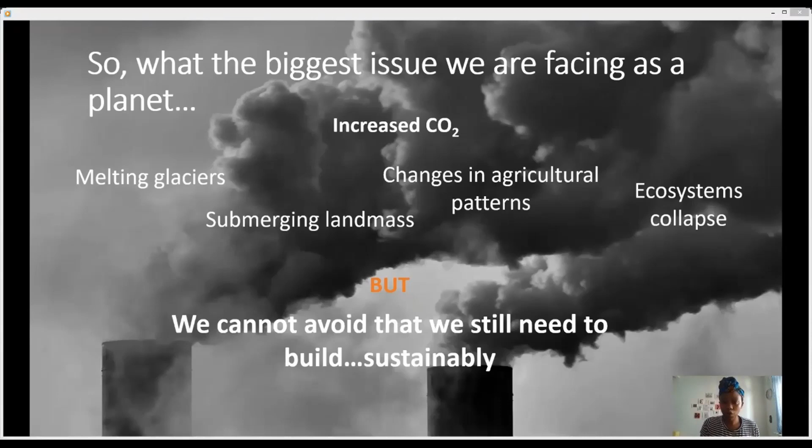However, considering all of this, we cannot avoid the fact that on the African continent, we are still growing. Therefore, we still need to build sustainably. And that's really the core message, is that we need to do this sustainably. And the question is, what does that entail? What does sustainable urbanization actually look like? And how could we do this in a more interdisciplinary approach?

So a lot of the time we talk about multidisciplinary, and I myself speak about multidisciplinary a lot, but multidisciplinary just means that different disciplines exist. It does not necessarily mean that these disciplines play into each other. It just means that they are all within the same space. So you'll have civil engineers doing civil engineer things, architects designing buildings and so forth, city planners planning for the future, without necessarily interacting very intensely with the architects.

Or even the people of that place in which they are planning, or even material scientists to find out the most sustainable types of materials that can be used, working together with civil engineers to see if these materials bear enough load, and so forth. All of this is generally widely done very separately. And I think we all know that this has to become more interdisciplinary, where all these different fields play into each other and actually work together in a way.

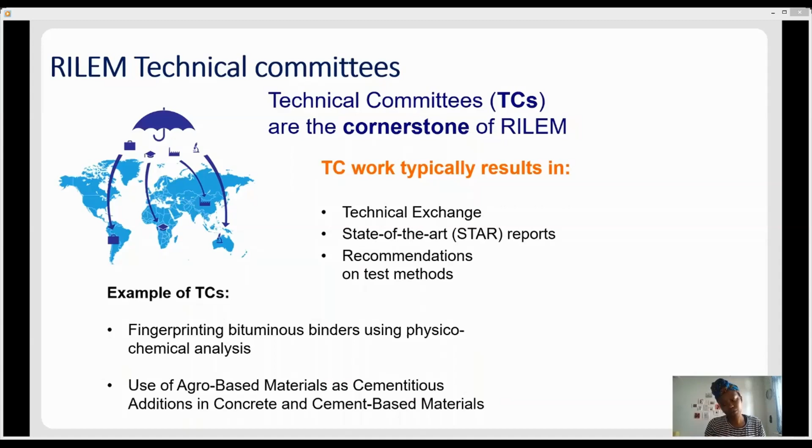Essentially what this technical committee does is focus on looking at agro-based materials as replacements for cementitious materials, or at least additions to them, in regions where manufacturing cement is really already quite expensive, or certain super plasticizers are not available because they are expensive and require transportation and so forth. So using these agro-based materials not only as cement replacement, but part of it also as plasticizers.

It focuses specifically, or at least mainly, on fresh cement and concrete properties in the early ages, and also to promote the use of agro-based materials, not just have it as something that is just research.

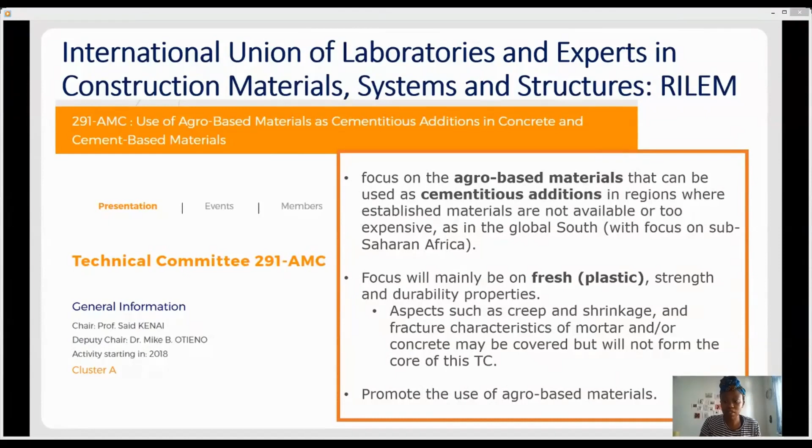Just to add on, we recently started a new subcommittee within RILEM called the RILEM Youth Council, and I'm the representative for Sub-Saharan Africa. The aims of this youth council are to encourage more involvement of younger researchers within RILEM activities, and build a network of young researchers, promoting the benefits of having this kind of network.

If you want to find out more about that, you can follow us on Instagram at RILEM Youth to find out more, and we post bi-weekly, so we're quite active. You can also just DM us if you have any specific questions and ideas.

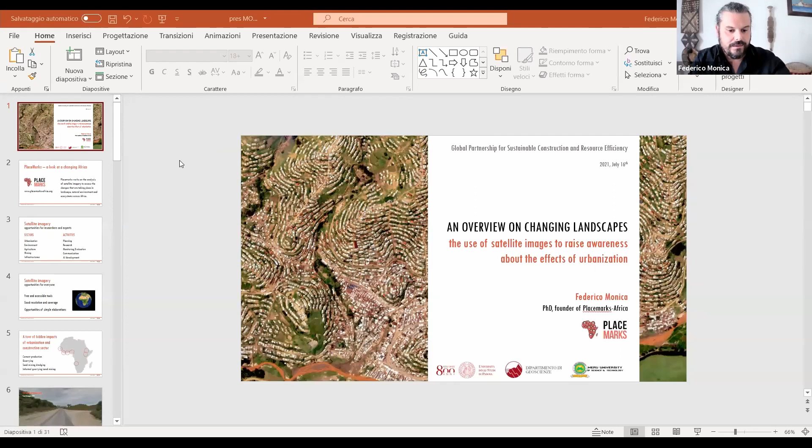So I'm Federico Monica. I'm a PhD and an architect and an urban planner, and I worked and I'm working especially in sub-Saharan Africa, and especially regarding the informal settlements and the effects of urbanization.

I'm here today with this presentation, especially to take you on a small tour, thanks to a project that I recently launched that is called Placemarks. Placemarks is a project that works essentially on satellite images, and has the aim to assess the changes that are taking place in landscape, in nature, and in ecosystem across the African continent.

We all know satellite images because they just became one of the everyday tools for us researchers and experts. Until 25 years ago, they were almost reserved to researchers. Now the situation is so different, and we will see why and how.

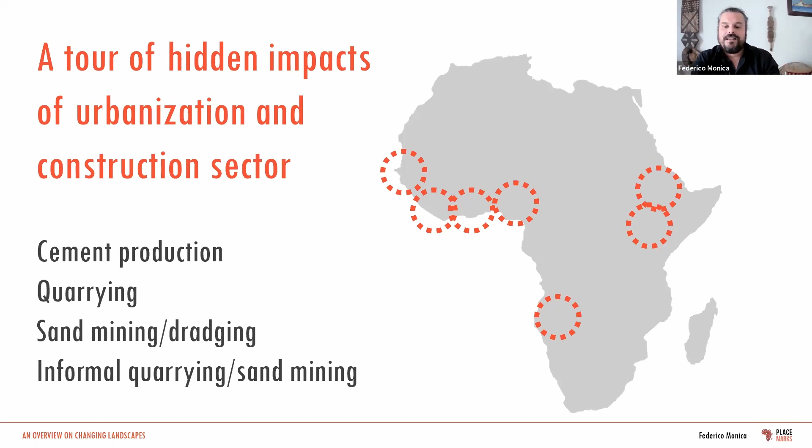So, as I said, let's start with some images. I titled this 'A Tour of Hidden Impacts of Urbanization', especially of the construction sector like cement production, quarrying, informal quarrying, or sand mining. A tour of hidden impacts because it happens that many times these impacts are not visible at the ordinary horizontal level, and we have to have an overview to see what's really happening around us.

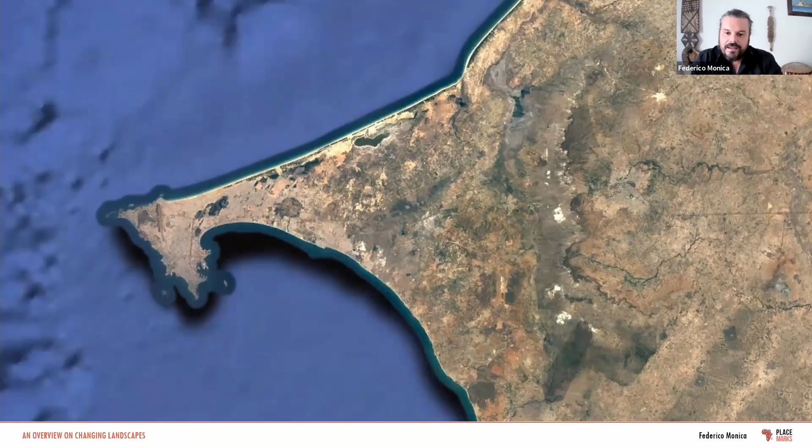And this cement plant production is particularly concentrated in the Dakar area, and even from space we can see clearly where those areas are located. We can see those white spots are the big quarrying areas that are used to feed the cement production plant. Dakar is growing fast, and the demand for cement is of course so high.

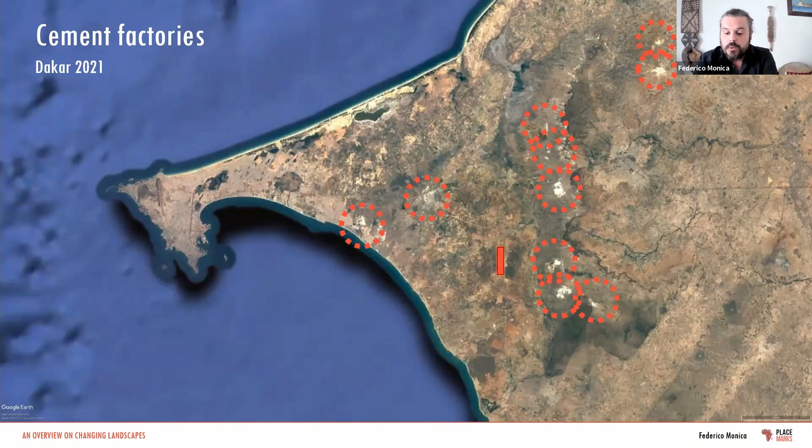We change country to go see what's happening in the one that is said to be the biggest cement production plant of the whole of Africa. We are in a small, really small town of central Nigeria. It's called Obajana. If I'm spelling the name wrong, I ask Nigerian friends to correct me.

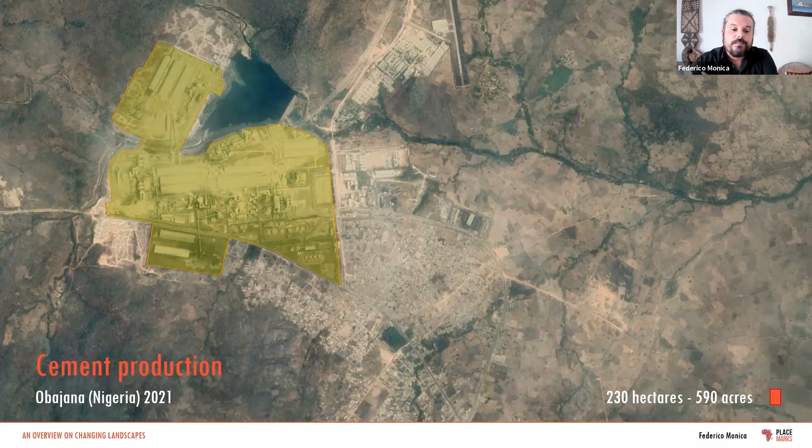This is just in the middle between Lagos, the economic and demographic capital of Nigeria, and Abuja, the political capital. We can see an enormous cement production plant that has an extension similar to that of the whole town. This is just the extension of the production area, because the quarrying area is 10 or 15 kilometers away. I don't want to focus on this extension, which is normal since demand for cement is high and these industries have to respond to that demand.

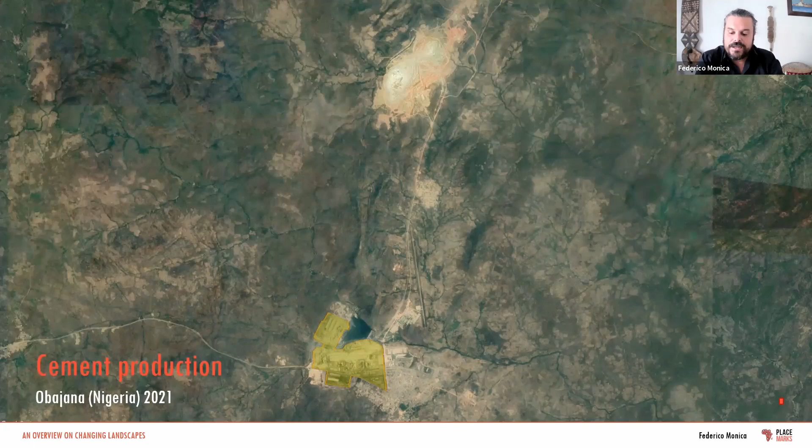I want to focus on another impact that becomes clear looking at this aerial view: transportation. In this small animation, we can see how many trucks are parked around the city and around the production plant, waiting to carry bags of cement to other places. The whole streets of the town are full of trucks, hundreds or thousands of them in line waiting to enter the plants. There are several entry points, all completely crowded with hundreds of trucks and vehicles waiting to load cement.

This seems an ordinary situation, because even in images taken at different times and in different years, we found a lot of trucks in line in these enormous parking areas around the town. This lets us know that in this particular case, the transport question and its environmental impact is probably the main one, even more than the impact of the plants or the quarrying itself, because we see a town completely overcrowded by trucks and means of transportation.

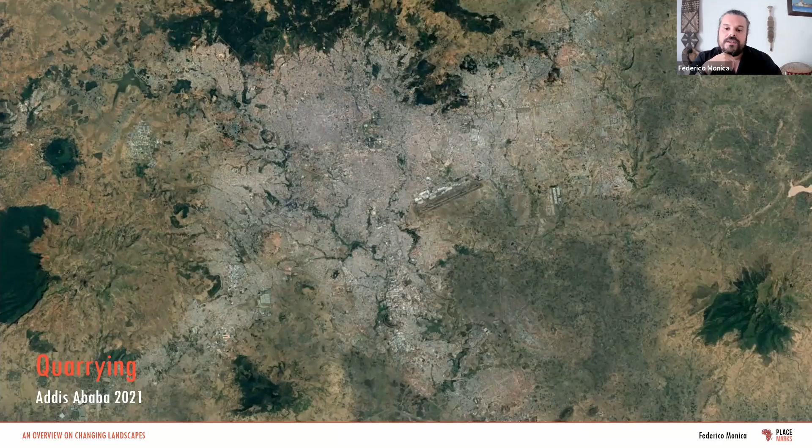The situation in Addis Ababa is particular because this is another fast-growing African city. The light gray part is the built environment of Addis Ababa, and we can see the shape of the city. It's interesting that a quick search of quarrying areas in Addis Ababa, both formal and informal, found these areas often collide with small rivers or canyons.

What we see in these images is that quarrying areas are, in a certain sense, giving shape to the city. So the extension of Addis Ababa is surrounded by these quarrying areas. For us urban planners this is strange, because we're used to thinking of the concept of a green belt, cities surrounded by green areas.

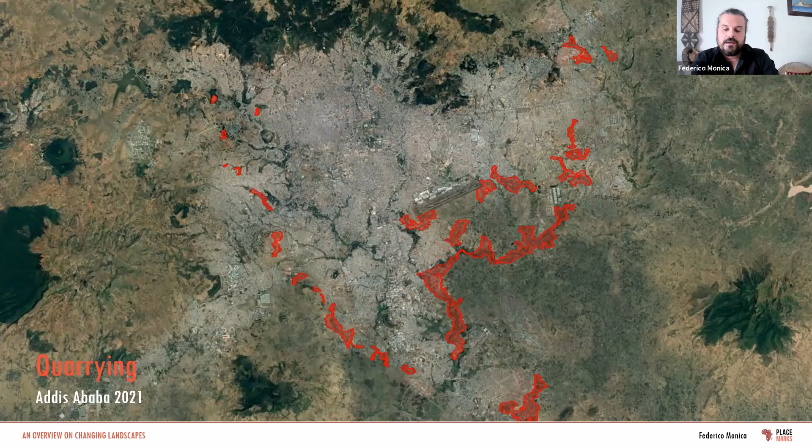To protect ecosystems and so on. In this case, many African cities are surrounded by gray areas, because quarrying removes the fertile layer of soil, so vegetation cannot grow for a long time. To restore the soil is a long and expensive process. We focused on Addis Ababa, but we see this situation in many towns across the continent — not just industrial quarrying, but also informal quarrying.

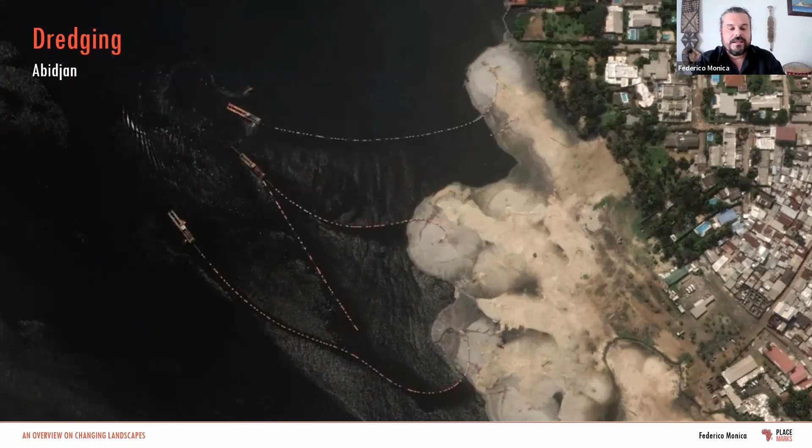Another situation I'd like to focus on is dredging. Here we are in Abidjan, where we can see dredging activities in the port channel. Abidjan is particular because, like many former colonial capitals, it was built in a lagoon area — part of the city on islands, part on the highlands, with many bridges connecting the different parts. The same problem affects the port of Abidjan, which has no unique hub but different quays in different areas of the lagoon, because there is still no room to concentrate all the activities in one place.

In 2015, the government of Ivory Coast started a very big program of port development, finalized to improve a lot the capacity of the port. This program is based mainly on extension.

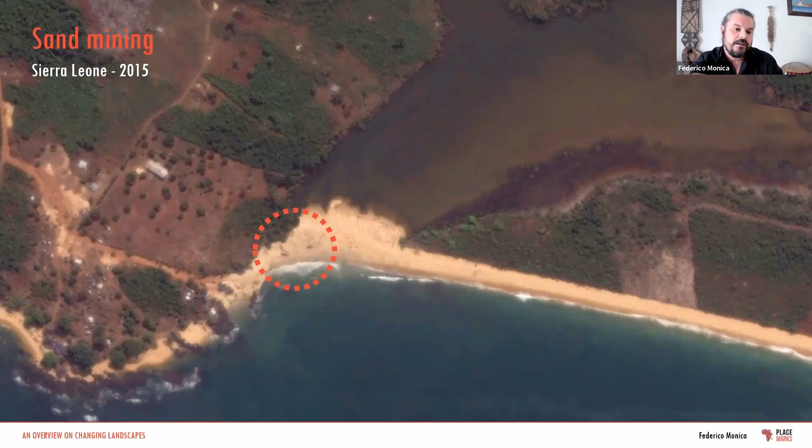This activity is based, of course, on research and scientific study about this phenomenon, but is based especially on the dissemination of awareness and on the dissemination of active citizenship. We know there are a lot of free and open research tools. I talked about Google Earth, but it's not the only one - there are a lot of tools here, easy to use, free, and available to everyone.

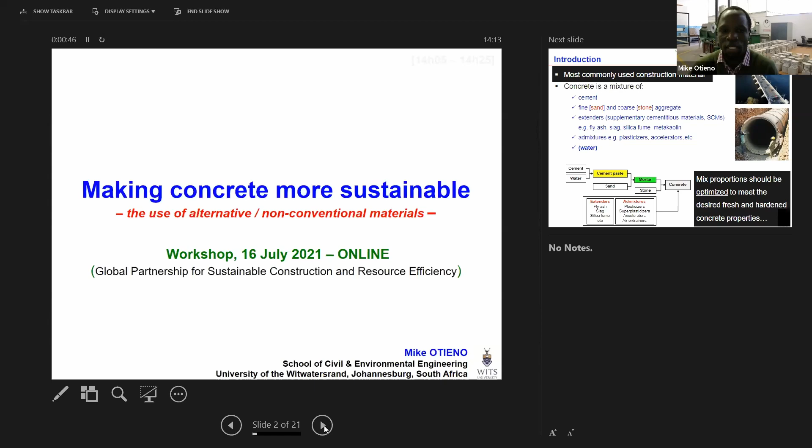So that's going to be the focus of my presentation. Before I start, considering the wide diversity of presenters that we have, I thought it wise to just give us a short overview of what concrete is. We already heard earlier today that concrete is a commonly used construction material, and it is the most commonly used one, and it is still the most preferred. You remember in the morning, Kolawole informed us that there is no replacement for concrete as yet.

So just to bring us all on the same page, we know concrete is a mixture of cement, aggregates, fine and coarse aggregates, some extenders, which we will talk about later on. We also have admixtures and water. I put water in parentheses here because water only comes into play when we're talking about conventional concrete. Otherwise, when we start to talk about other types of concretes, like for example geopolymer concrete, alkali activated concrete, then water doesn't become really necessary.

What is most important is that these ingredients of concrete are of course proportioned in an optimized manner so that we can meet both the desired fresh and the hardened properties. So that's basically what concrete is for those who really are not so familiar with this material as such.

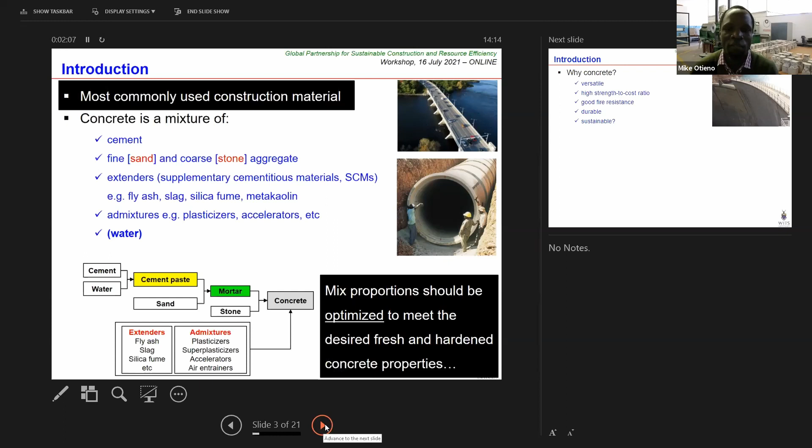So the reason why we use concrete is widely known. It is a versatile material, high strength to cost ratio, good fire resistance, it is durable. And whether it's sustainable or not, yes, I think it is sustainable. And that is why the title of my presentation says we want to make concrete more sustainable.

The reason why I say it is sustainable is because if you compare concrete with other construction materials, like for example timber and steel, you will find that for the benefits that we get out of concrete, the technical benefits, we still really can consider concrete to be a sustainable material. Even if we look at its carbon emissions and compare that to other materials, if we were to construct a structure using timber or steel and compare that to one made using concrete, comparing the strength to cost ratio, you would still find that concrete is relatively more sustainable than those other materials.

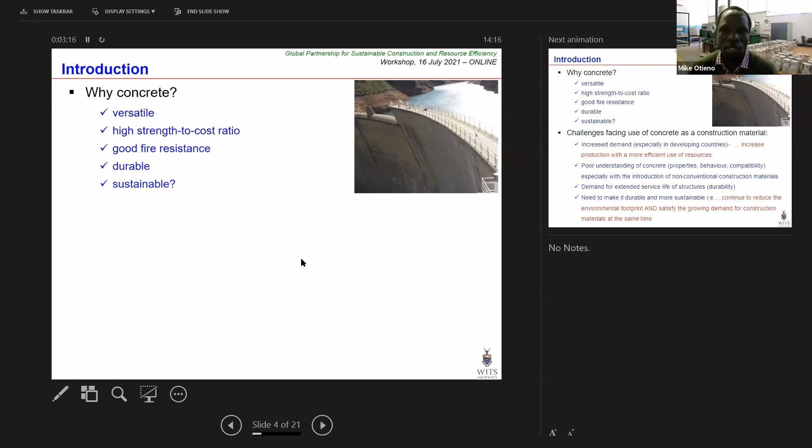Nevertheless, we still have some challenges. Of course, the challenge that concrete has as a construction material is that there is increased demand, especially in developing countries in Africa, in Asia, and in other parts of the world. So we need to really be more efficient in the use of our resources. So that's one challenge that we have, the increased demand.

So the next one is about the poor understanding of concrete. And this goes back basically to our curricula, the level of experience in terms of the engineers that we have, the knowledge of the material, how it behaves, its properties, compatibility with other materials, and so forth. So this is one challenge that we have.

We also have a challenge of the need for much more extended service lives of our structures, and this talks directly to durability of our concrete structures. We have now clients demanding for 100 years service lives that are maintenance free and so forth. Then, of course, one which is more relevant to this presentation is the need to make it durable and of course more sustainable.

This is basically what most of us talk about when finding alternative materials for making concrete. This is the crux of the matter - really finding these materials and making sure they are sustainable in terms of both environmental footprint and other factors we will consider.

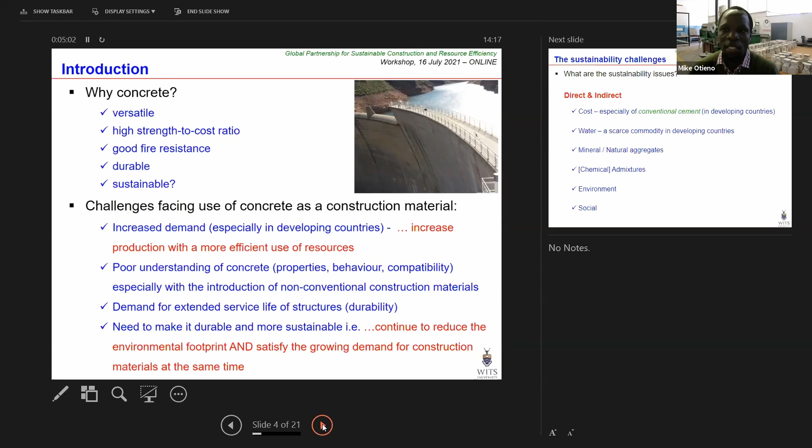So what are the sustainability issues, or what I refer to as challenges that we have at present? They could be directly or indirectly related to concrete. The most common one is cost, which relates mainly to plain Portland cement, the conventional cement used in most developing countries, and we know cement is the most expensive ingredient. Then we have water, which is also a very scarce commodity in Africa and developing countries in general.

Aggregates are also another important aspect we need to think about. We just saw from the previous presentation how damaging we can be to our environment through mining activities, whether for materials for making cement, or in this case mining, exploring, and extracting mineral and natural aggregates from virgin rocks. This can be damaging to the environment.

We also have admixtures, both organic and inorganic, known to have very high carbon footprints that damage our environment. That's why concrete in general has a very negative impact on the environment as it stands. And of course, there are also social aspects related to it, which we tend to sometimes not take into account when we talk about sustainability issues relating to concrete. We will talk about this in a moment.

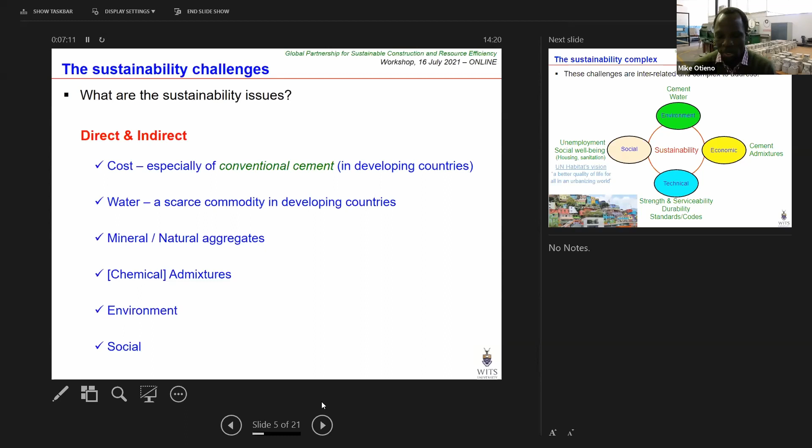So these are the challenges we need to talk about and find solutions to when thinking about alternative, or what I later call non-conventional concrete making materials. This leads us to what I refer to as the sustainability complex. We have a lot of challenges, all interrelated and very complex to address. We have the environment.

Plain Portland cement is the main one to talk about here. During its manufacture, we just saw from the previous presentation how damaging it can be to the environment. Water, as I've already mentioned, is a very scarce resource. And then we have economic aspects: cement and admixtures.

Then we can move on to the technical aspects. We need to think about the strength, serviceability, and durability of concrete. When it comes to technical aspects, other factors to consider relate to the standards and all the design codes that we use.

Then on the social aspects, we may not be very alert to this, but there are serious consequences or effects when it comes to, for example, using alternative or non-conventional concrete making materials. There could be unemployment related to that. It could affect people's social well-being, things like housing and sanitation.

I was looking at UN Habitat's vision, and they state their vision as creating a better quality of life for all in an urbanizing world. We heard from the UN Habitat presentation earlier in the morning. So we really need to think about all these aspects, and this is why I call it, from a concrete interest perspective, a sustainability complex. We really need to think about all these aspects together.

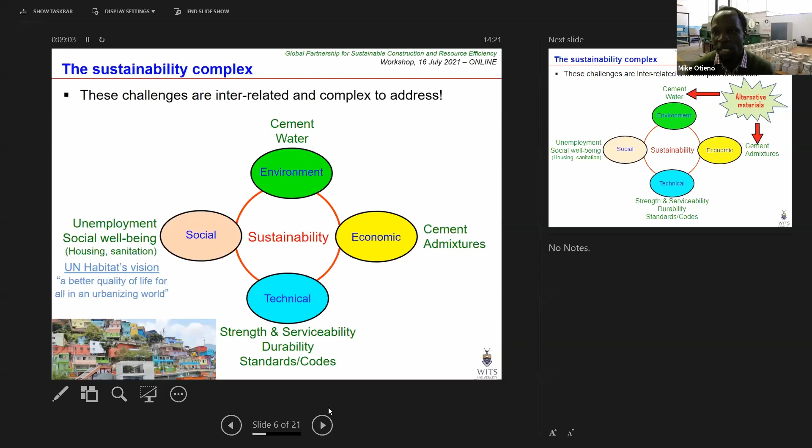So when we start to think about alternative materials for making concrete, we think about what are the alternative materials in terms of cement, water, aggregates, and admixtures, and what are the economic effects of these alternative materials. We need to be aware that when we use alternative or non-conventional concrete making materials, these will definitely have direct or indirect impact on each of these sustainability pillars: economic, social, and environment, and of course the technical aspect is quite important from an engineering point of view.

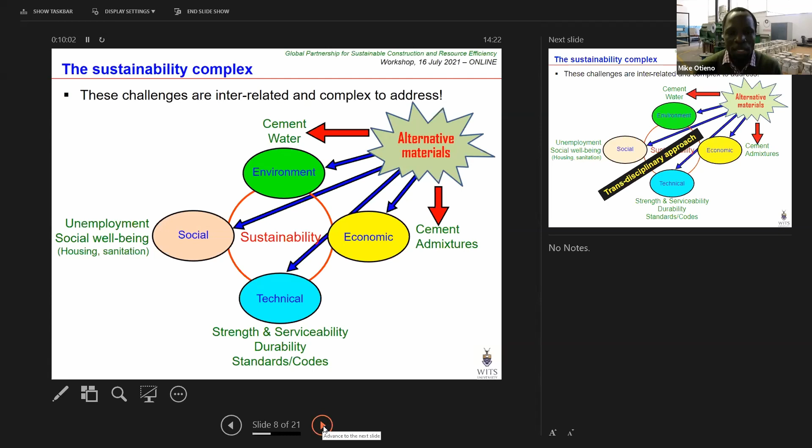So we really need to think about this carefully, and that is why my proposal is that we really need a transdisciplinary approach. We need to integrate the natural, social, and health sciences in a more humane or humanities context, so that we can try to find a solution that may not be optimal, but one which is acceptable to the community for which that material is being proposed.

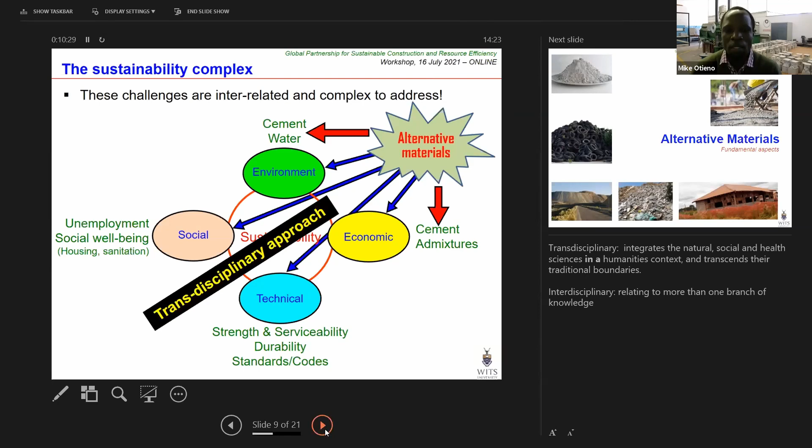So I'll now move on to another topic in terms of fundamental aspects that we really need to think about when we start talking about alternative materials or non-conventional concrete making materials. The first thing I thought of doing was to give a definition of what this material is, for those who may not be conversant with this.

I have defined an alternative or non-conventional concrete making material as one which can be used to partially or fully replace an ingredient for concrete making. What is important is that it needs to be used in a way that doesn't compromise both the hardened short-term and long-term concrete properties. That's the definition of an alternative or non-conventional concrete making material.

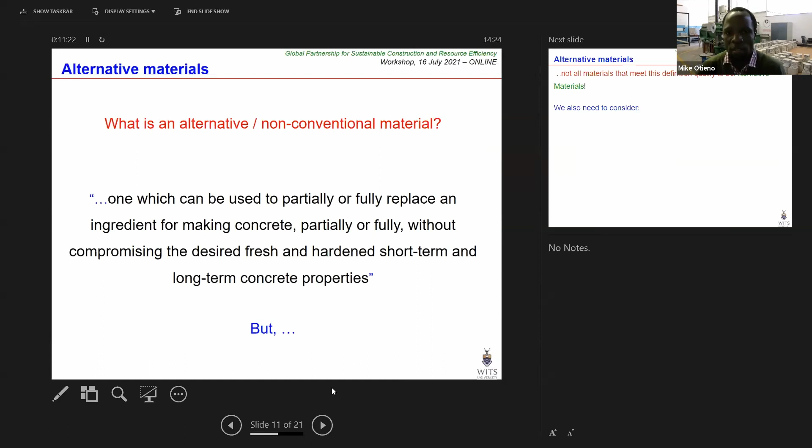But not all materials that meet this definition will qualify to be an alternative material. I'm sure the question is then why? We will come to that, but just to start with, we need to consider other factors as well.

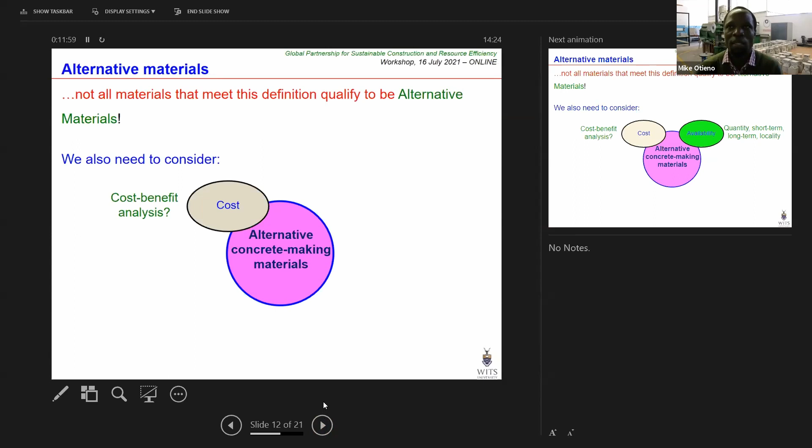The first one being cost. What is the cost impact? For example, it may have a very beneficial cost in terms of reducing the cost of concrete, but what is the cost of it from a social point of view? We need to find that out. Sometimes we only think about the cost of an alternative material in terms of how much cement it replaces in concrete, but we don't think about the life cycle costing of that material, which is quite important.

We also need to think about the availability of this material. When I talk about availability, I'm talking about the quantity, whether in short term or long term, and of course where it is located. I'm not trying to infer that we need to have an alternative material in large quantities for it to be viable as a concrete making ingredient.

Sometimes it may be important just for a once-off project, but the gains that you get from that, people can learn from it. So we should not look at availability in terms of having it in large quantities. If you wanted to build a small structure once-off, you really don't need a large quantity - for example, if you were using rice husk ash, it could be enough to just complete a small part of a project. We really need to think about those types of things, not necessarily from a long-term perspective.

And related to that, we really need to think about the opportunity cost. This may be directly or not directly related to the concrete itself. When I talk about opportunity cost, we need to think about what am I foregoing when I choose to use an alternative material - what is the opportunity cost in terms of what I'm going to lose, and does it warrant me using that alternative material? We should not confuse this opportunity cost with the cost itself - these are two different aspects that need to be looked at differently.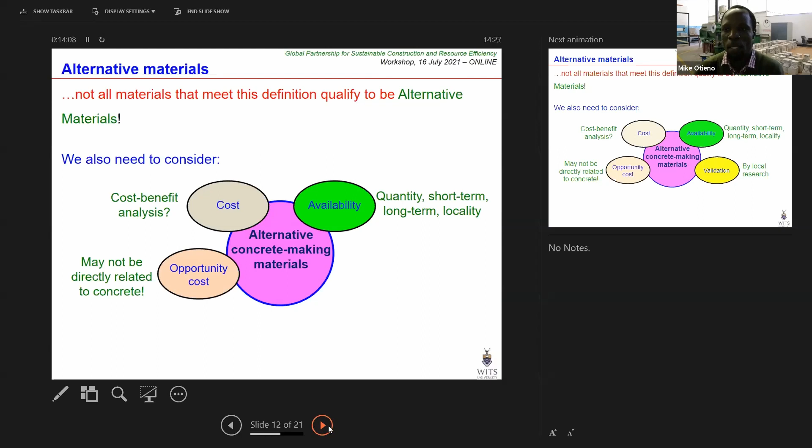And then we also need to think about the validation of these materials - validation in terms of its performance, performance in terms of engineering properties. Has there been local research carried out? You will find that in some cases these alternative materials are exported from their locality, and research is done somewhere else, tested somewhere else, and then the outcome of those studies is imported back to where the material was exported from. This more or less beats the purpose, because these materials need to be tested on the ground where they are expected to be used.

And then finally, the social impact is quite important - whether you can have a very good material to be used as a replacement, for example for aggregates or for cement. But if the community does not accept it - and this has happened a lot in many parts of different countries - all the research that you've done may end up being useless, because the community was not involved. This is why all these aspects need to be really put into account.

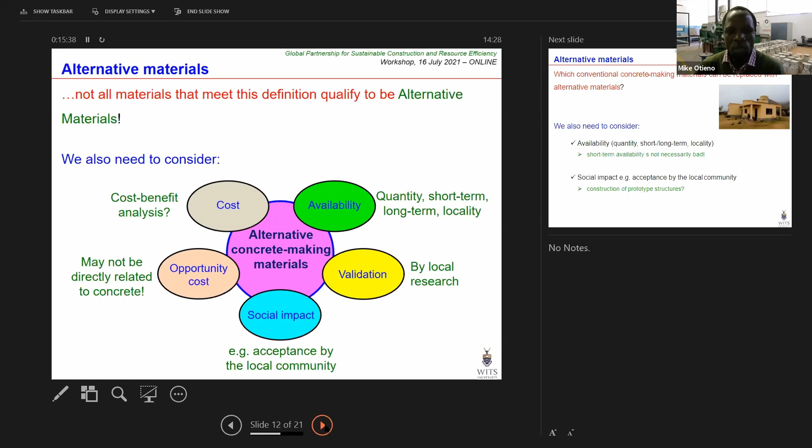So when we talk about things like availability, I've already mentioned that short-term availability is not necessarily a bad thing.

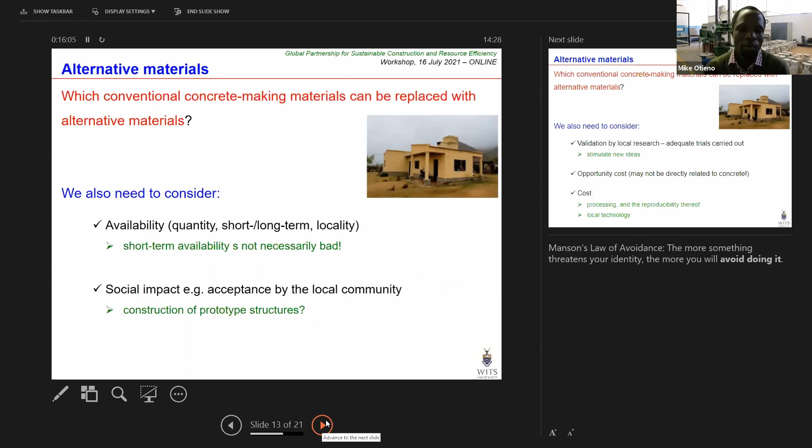The social impact, acceptance by the local community, and of course, to do this, sometimes we may need to construct prototype structures to show them that this thing can work, and we can also use them as an example in terms of using those materials and constructing our own structures using those replacement materials. And then validation by local research is quite important, and it stimulates new ideas.

We usually, as I've already indicated, it is not really a good thing to import the outcomes of other research done on local materials without necessarily validating them, especially when we take into account the environmental exposure aspect. I've already spoken about the opportunity cost, so I will not go into that again.

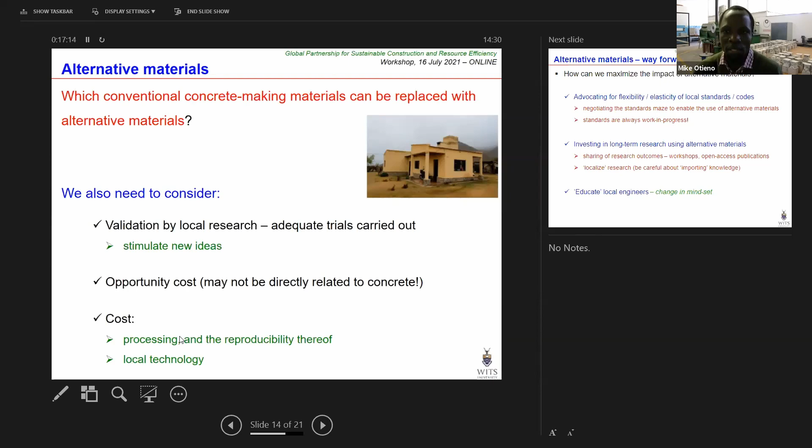And then, of course, when we talk about cost, we need to think about the cost of processing and the reproducibility thereof. For example, in the case of calcination of agri-based or bio-based materials, we need to think about the processing aspect. How are we going to process this material, and how are we going to ensure consistency of the ash that we obtain? This means we need to think about the reproducibility of these processes. And of course, availability of local technology is quite important.

What is also quite important is the need for flexibility, or what I also call elasticity of local standards of design, or codes of practice in general. We tend to be a bit fixated in terms of using standards and not being able to think out of the box, which is quite a dangerous thing in the world we live in today.

So we really need to have open minds and be able to negotiate standards in terms of using alternative materials. What is important here is that we need to understand that standards are always work in progress. It is very dangerous to take a standard and use it as if it's final, as if it's not going to change. Standards change, they are revised, and we need to think about them as work in progress.

This is why, as African researchers or people who do research in Africa, we really need to try and advocate for flexibility in the standards that we use, as opposed to just adopting standards like the Euro codes for use in Africa. Of course, you can always change a few things, but it is much more important to be flexible in terms of using standards in general to accommodate these alternative materials.

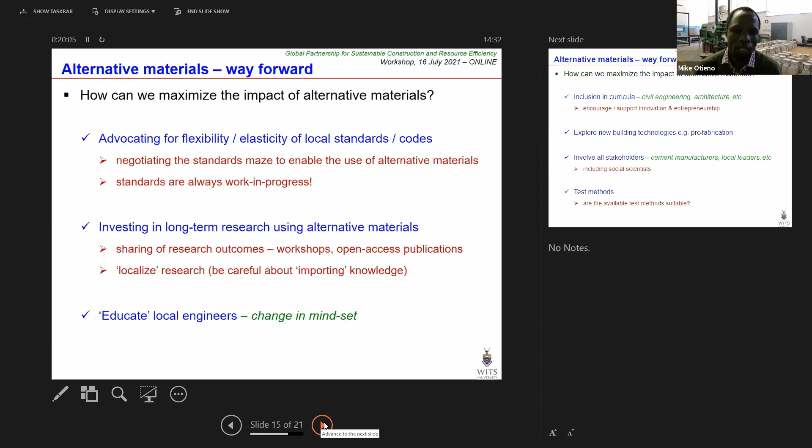So sometimes you may find that the local community might be willing to use these materials, but engineers do not have the confidence to use them. Why? Because they don't have any experience, or it's not what they are used to. So it is important to really think about this.

And then inclusion in our curricula—civil engineering, architecture. I know the chair, just in a few presentations before this one, it was said that things like sustainability become very strange to students when they go into postgraduate level. These things should be incorporated in the undergraduate curriculum.

And in relation to this, we really need to encourage and support innovation and entrepreneurship, because it is only by doing this that we can encourage researchers, novice researchers, emerging researchers, and so forth, to really explore new alternative or non-conventional concrete-making materials. And this goes hand in hand, of course, with new building technologies, prefabrication, and so forth.

I will not underscore again the need to involve other stakeholders, including social scientists. But what is also most important is to reconsider how we test these materials. Do we continue to use the conventional ways of testing? What are the available test methods, and are they suitable for concretes made using these alternative materials? These are questions we need to think about. I'm not saying they're not suitable, but sometimes they may not be, or may be suitable only to some extent. We need to be very objective about the test methods we use.

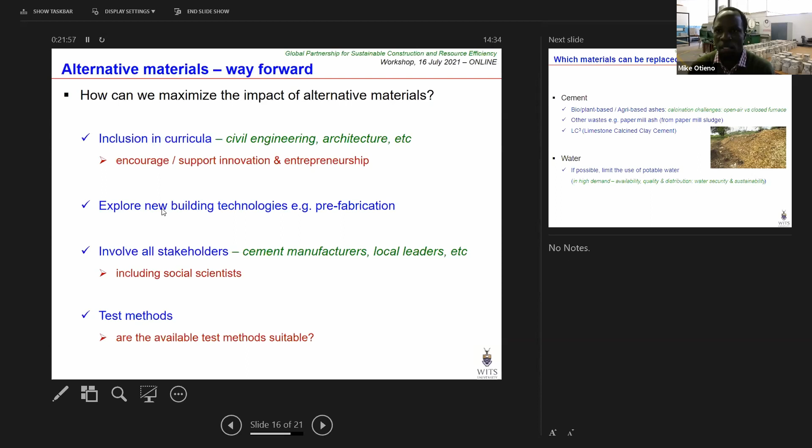I'll go through some of the materials we can replace in concrete. Of course, cement - some of this has already been talked about in previous presentations. Bio-based or agri-based materials - I've already indicated the challenges with this: the calcination problems, how to maintain reproducibility of these ashes, especially when calcination is done in open air furnaces as opposed to kilns or closed furnaces where temperature and rates of cooling and heating can be controlled.

We can also use other wastes. The intention here is not to give an indication of all the types of waste we can use for making cement. I'm sure you've heard of LC3, the limestone calcined clay cement. Whether it is useful in terms of being applicable to the African continent is a question we really need to think about before we indulge in investing in it.

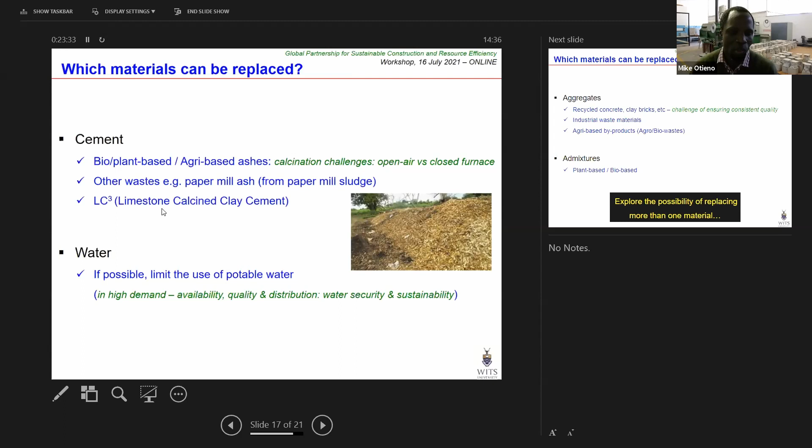Of course, water is something we can replace. When I say replacing water, especially in conventional concrete, I'm talking about limiting the use of potable water. Water is a scarce commodity, especially in Africa, so we need to think about how to minimize its use. Sometimes at a large construction site, water used to clean tools after construction is let to go, but it could ideally be reused the following day to make new concrete, because that water is not really deleterious to concrete as such. These are the kinds of things we need to think about.

In terms of aggregates, we can use recycled concrete aggregate, clay bricks, and so forth. The challenge here is ensuring consistent quality, and this has been the main issue when it comes to using recycled aggregate concrete. How do you ensure consistent quality? How do you sample your aggregate for testing?

There are, of course, industrial waste materials like blast furnace slag. We can also use some agri-based byproducts or bio wastes. In terms of admixtures, there are plant-based or bio-based admixtures that can be used as opposed to chemical admixtures, which, as I've already indicated, have very high carbon footprints. We need to think about some of these things, and we can only come to know of these plant-based or bio-based admixtures if we allow for innovation and exploration by novice researchers.

And of course, what is also important is to ask whether replacing more than one material in concrete is possible. That's a question I will leave as food for thought.

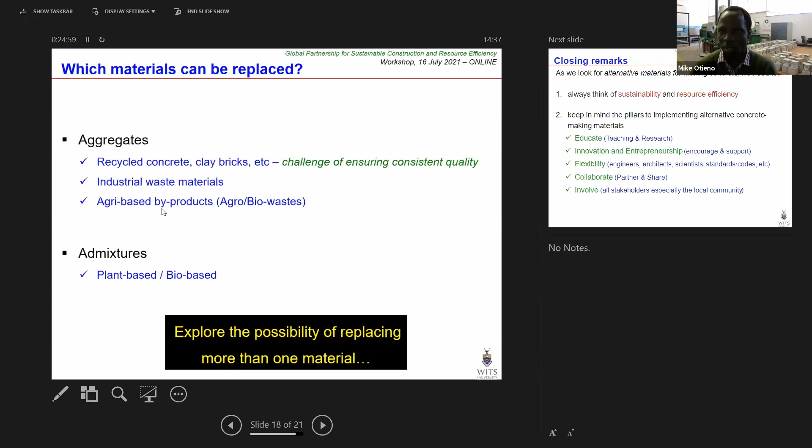So just to close, as we look for alternative materials, we need to think about two things: sustainability and resource efficiency. We are not looking for alternative materials to replace conventional ones just for the sake of using the word sustainability. We also need to think about resource efficiency, which is quite important.

We need to keep in mind what I'm calling pillars to implementing alternative concrete making materials. We need to educate our engineers and our students in institutions of higher learning, and this relates also to research. We need to encourage and support innovation and entrepreneurship, especially amongst young researchers.

We need to encourage flexibility. This is quite difficult, but it goes hand in hand with a mindset change - whether for engineers, architects, scientists, social scientists, or other professions. And flexibility, or elasticity as I mentioned before, is also needed in terms of standards and codes.

Another important pillar is collaboration. We need to partner with each other and share the information we have. Open source publications are quite welcome, especially for sharing research outcomes. Finally, we need to involve all stakeholders, and to me the most important one is the local community where these materials are intended to be used.

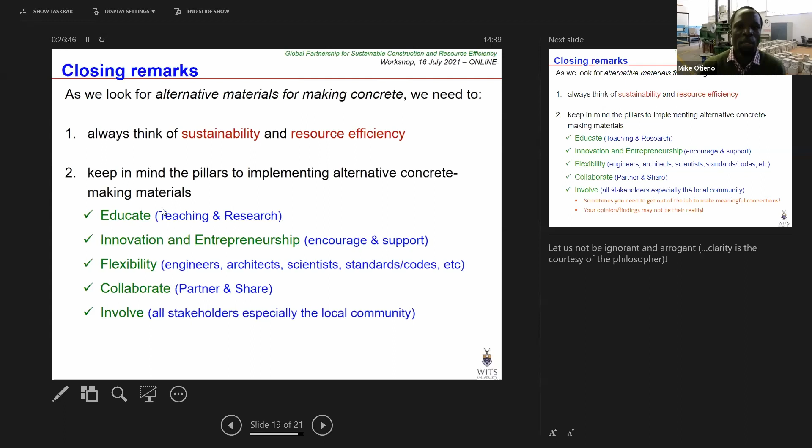Thank you very much, Mike, for this really interesting presentation. The points you touched on at the end are so important, particularly in terms of involving local communities, because I think they are often the ones missing within the debate, and they are the ones who often also are the most impacted by this. The change of mindset is also important, because often local and indigenous knowledge or way of doing things before is often ignored. So thank you very much, Mike.

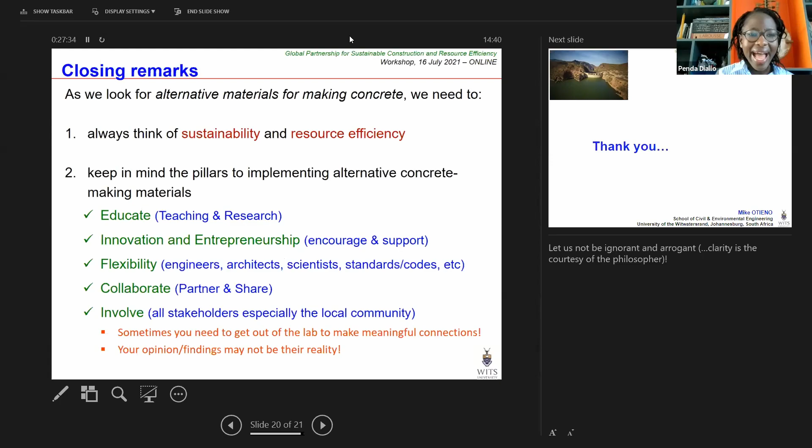Now we're going to have Alistair Marsh, who is a postdoctoral researcher at the University of Leeds, working on alkali activated cement as well as the use of clays and soil in other types of construction. Thanks, Alistair, for joining us today, and you can start your presentation.

Thank you. Hi, sorry, excuse me. I'm co-presenting with Marusha Nambatya. Could you introduce her, please, as well? Okay, thank you, thank you.

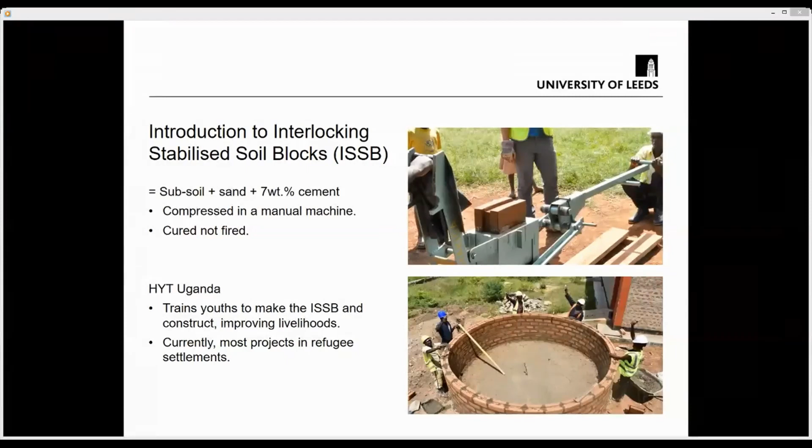Next slide, please. ISSB is broadly used. We have two versions of it: the straight ISSB, which comes from a straight mold, and the curved ISSB. The curved ISSB is what we use when we are constructing rainwater harvesting tanks. Same ingredients - the difference is in addition of a waterproofing agent in the mix for the curved ISSB for water tanks. Otherwise, the ISSB is broadly used in school buildings, housing, staff accommodation, perimeter walls and kitchens.

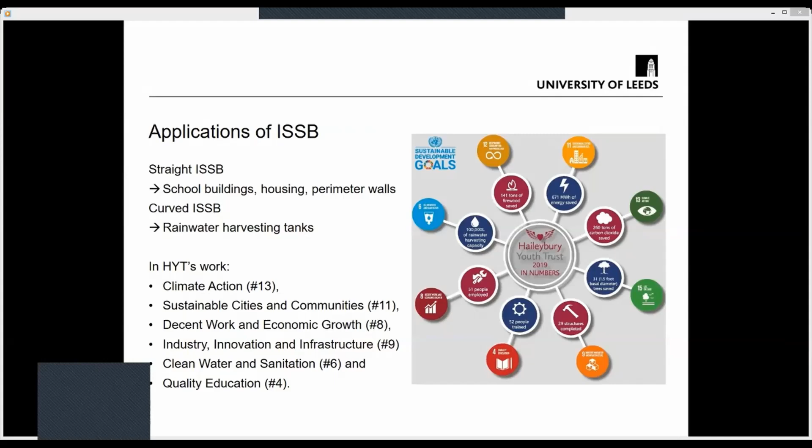In HYT's work, we fulfill a number of sustainable development goals, including climate action, given that the ISSB is environmentally friendly without need for firing and is simply cured. In the communities where we work, we give sustainable communities that are well trained in how to use the ISSB and the importance of using ISSB versus firing the bricks, and a number of others like industry innovation and infrastructure, through construction of water tanks, clean water and sanitation, and quality education to those who are the beneficiaries of our training program, as well as those who are the beneficiaries of the school structures that we end up constructing. Next slide, please.

I'll let my colleague Alistair speak about the technical performance of ISSB. Thank you, Marusha. So when evaluating the technical and environmental characteristics of ISSB, it really has to be done in comparison and in context with the two dominant materials for building comparable structures in Uganda, that is concrete blocks and fired bricks. In relation to concrete, ISSB have a slightly lower cost and a slightly lower cement use. And in comparison to fired bricks, there's no need for firing, and hence there's no deforestation, which is a large issue for Uganda, from the cutting down of trees to fire brick kilns. A unique selling point of ISSB in terms of the resource supply is that all the soil used is sourced on site.

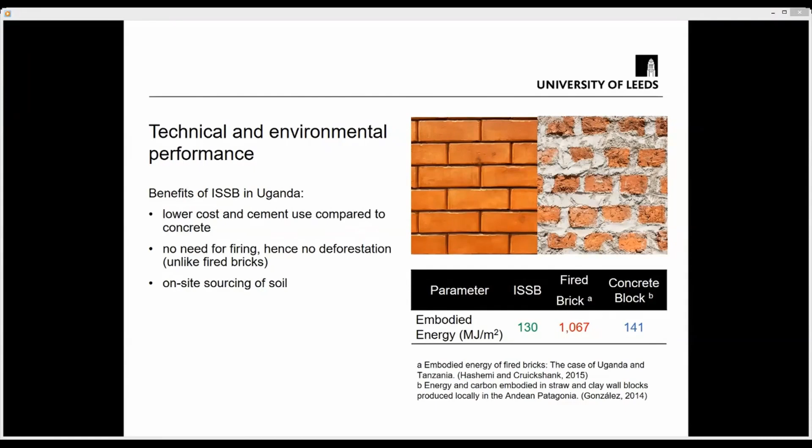In the next few slides, I'll explain some of the opportunities we've identified for improving the product of ISSB from our work on this project so far. This is around two components of the block: the cement and the sand.

For a long while now, ISSB practitioners have been wanting to really minimize the amount of cement used, whilst maintaining the same material performance and confidence in the product. This is both to reduce the cost—cement is the most expensive material component and also results in the flow of money out of the region and country—and also to reduce the embodied carbon.

To try and address this, we're currently investigating the use of rice husk ash as a cement replacement material. Of course, many of you will be familiar with the use of rice husk ash as a cement replacement in concrete, which is scientifically and technologically very well established. However, use of rice husk ash in compressed stabilized earth blocks offers particular questions and challenges.

In particular, these blocks are not cast like concrete, they are compacted. So we need to understand the role of the rice husk ash in affecting the optimum moisture molding content, the compaction behavior, and therefore the ultimate effect on compressive strength. We would expect that the optimum range of replacement would be the same as in concrete, so approximately in the range of 10 to 20%, but this needs to be tested and established.

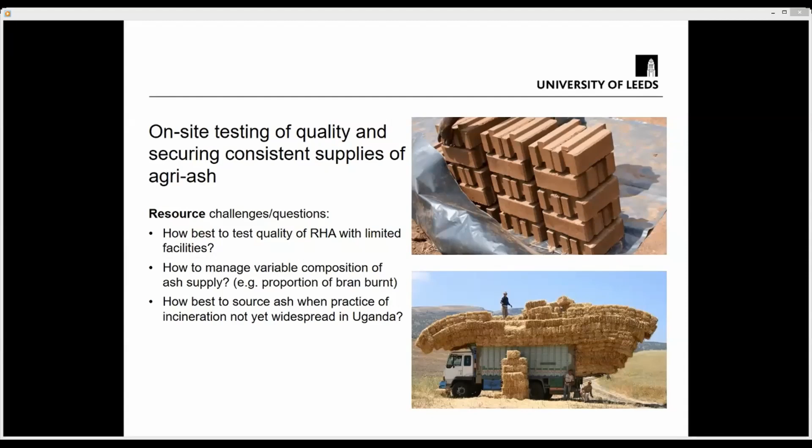Lastly, as Marusha mentioned before, sand is used in ISSB to achieve the optimal particle size grading and therefore to get the best mechanical properties. But we can't ignore the fact that, as in many other parts of the world, sand extraction does cause ecological harm.

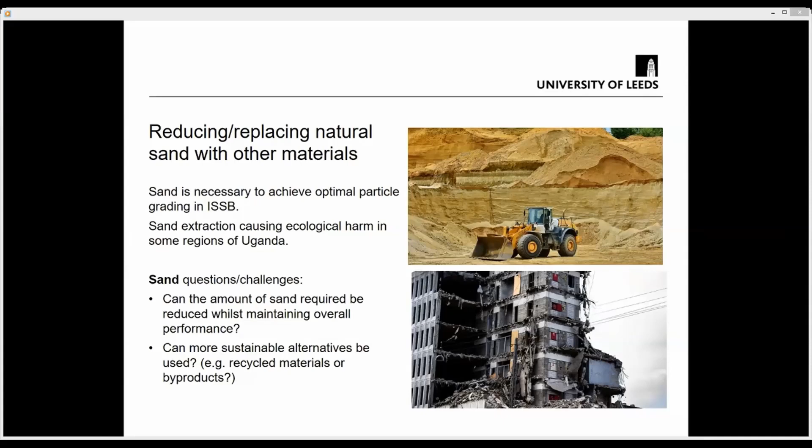So questions we're recently asking ourselves are: can we reduce the amount of sand needed while still maintaining technical and environmental performance? And building on recent research in concrete, recycled concrete and other materials, can we use more sustainable alternatives, for example recycled materials or byproducts, instead of using naturally extracted sand? I'll now hand back to Marisha to explore some of the other challenges and opportunities for wider adoption.

Thank you, Alastair. Indeed, there are other challenges and opportunities for improvement, and I'm going to speak majorly about four: what it takes to convince clients, how architects need to be empowered, the impacts of government policy, and sustainable livelihoods. If you would go to the next slide, Alastair.

When it comes to convincing clients to adopt interlocking stabilized soil blocks as a construction material versus using fired brick, this has proven to be a long, continuous process so that you can build the confidence of the client. There's back and forth convincing members in the head offices, those in the local offices, having members visit some of the completed projects to have the seeing-is-believing experience.

Obviously this directly affects the tendering process because many of them are very prescriptive—prescriptive to conventional materials such as fired bricks, and they specify fired clay bricks. So that in a way already eliminates the introduction of novel materials like ISSB, and it takes a whole different angle to actually get buy-in from the clients, which includes having to partner with them and maybe then not have to go through the full tendering process.

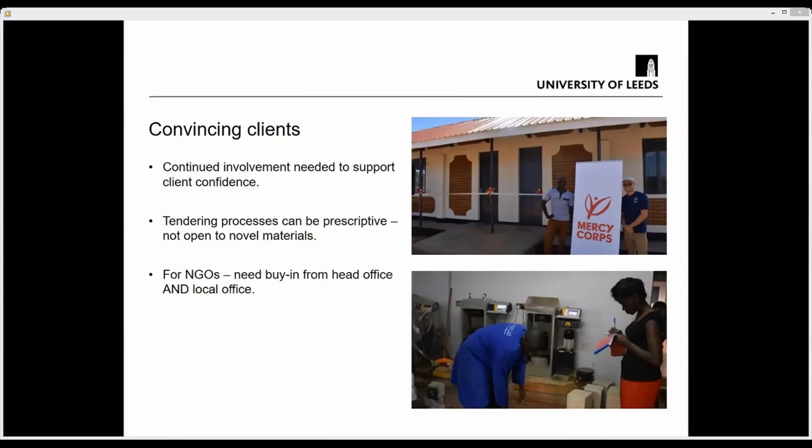So that's one of the challenges we've encountered with making sure that ISSB is used in the structures for different clients.

Second slide is on empowering architects. When it comes to architects, they have a very key role in specifying materials that are going to be used in construction, and they do that clearly at the design phase. Whereas they do it at the design phase, many of them lack the confidence in specifying some of these novel materials, particularly because they are not always engaged throughout the construction process.

And therefore they don't have the practical experience of seeing the novel material being implemented. So it would really be beneficial to see some of these novel materials like ISSB included in the university curriculums to begin with.

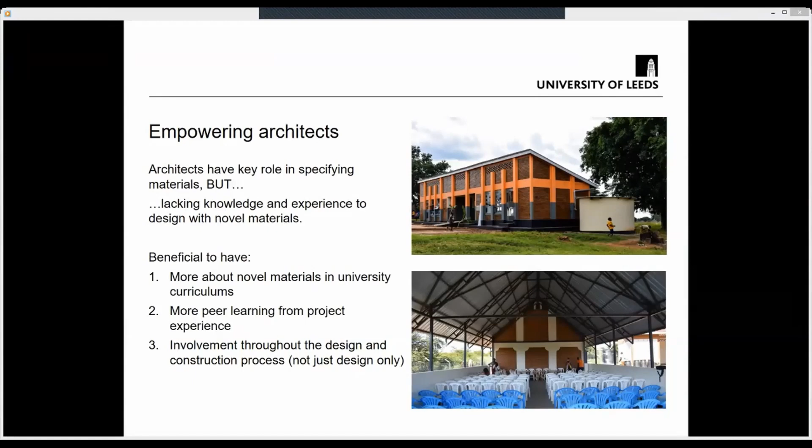Once we see architects being involved beyond the design phase into the construction, we believe that we shall have more and more architects specifying novel materials in the design of their different structures.

Yes, this is a long shot, but it's really possible - we see it as something possible: government and organizational policy. Imagine that large clients or funders like the UNHCR had an appreciation of the impact of construction materials on the environment, for example, the impact that fired bricks have got on deforestation.

That would create more awareness in being able to look beyond just simply funding a project. It would create an opportunity for the government and the organizations to reconsider what's in their policies, especially when they put out tenders.

And it will be very interesting to see that for the materials being used in construction, all the materials being used in walling are checked for environmental performance. We feel that if the government could go ahead and put a ban on deforestation for brick kilns, it will be a great step towards adoption of ISSB in general construction in Uganda.

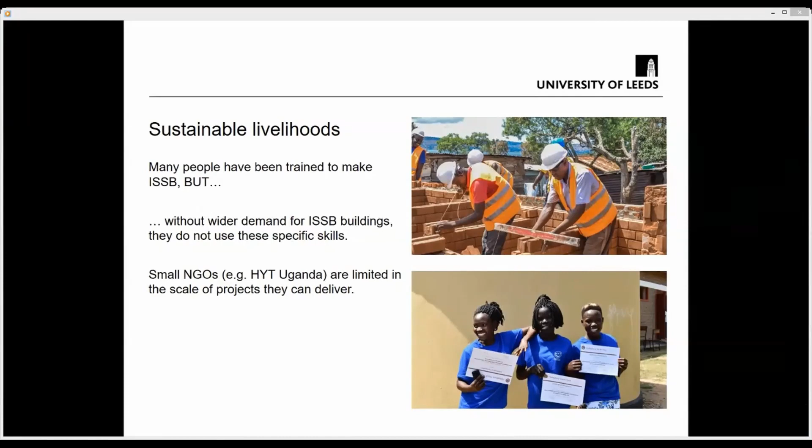Having discussed those challenges, I just wish to conclude by mentioning that indeed ISSB has good sustainability performance in Uganda, and this is proven by the number of projects we have completed, the savings in the number of trees not cut down, and we see that there are opportunities to improve the costs as well as the embodied carbon of the interlocking stabilized soil blocks.

And we are open to any collaborations out there that see this as an opportunity to improve this novel material. There are also opportunities to overcome barriers to adoption of novel materials, and it will be quite interesting for us to hear from other members present how they've managed to bring about novel products into the commercial construction industry.

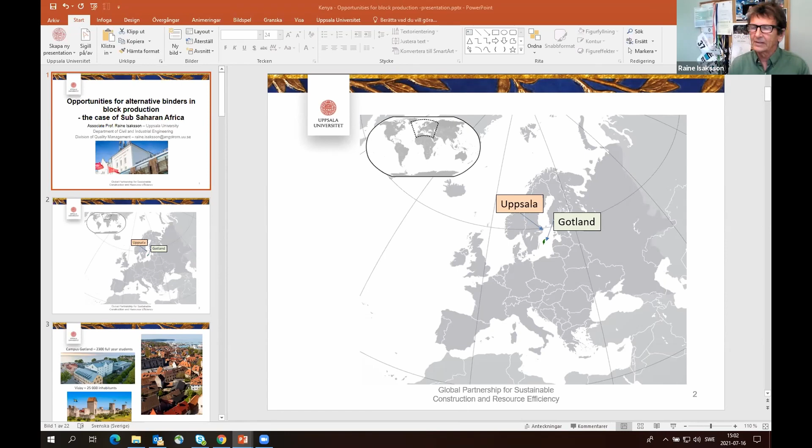So just putting us on the place somewhere. Uppsala University is often ranked among the 100 highest ranking universities in the world. It has 12 campuses, 11 of them situated in Uppsala, just north of Stockholm. We are on the island of Gotland, the largest island in the Baltic Sea. It's a small campus and the island only has 60,000 inhabitants. We have 2,300 full-year students here.

What is different for us compared to Uppsala University is that we are the previous Gotland University, and we mainly have teaching here, but we are expected to increase our share of research considerably. Uppsala generally has 60 to 70% of their financing for research. We have much less, and in the division of quality management, we have practically nothing. So our head of department is pushing very hard to increase the share of research, which means we need to find the funding, but we also need to find the researchers to do the work.

Gotland in the summertime is one of the largest tourist destinations in Sweden, so we double our population. But it's a short period of the summer season, three months. The rest of the year it's maybe a little bit gray, but it gives good opportunities for studies and research.

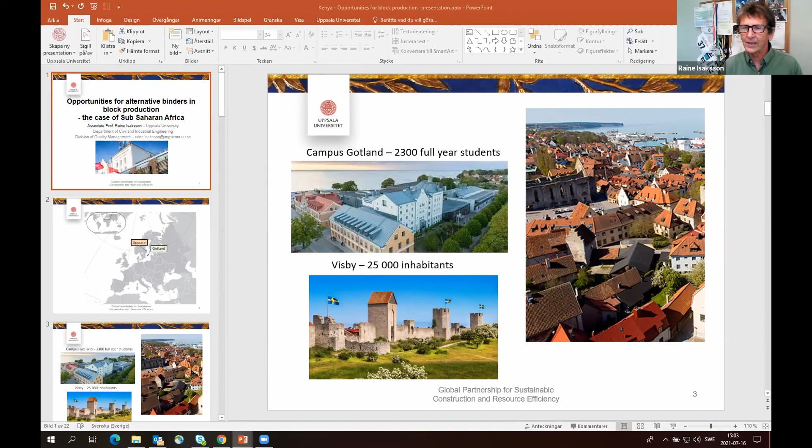I call these research development questions a little bit rhetorical, because you think quality management—so what does that have to do with building? Well, quality management is part of all kinds of improvement, and I think what we bring to the party is our focus on customer needs and stakeholder needs. So we start from the outside in, looking at what is needed, how can we help. We provide a kind of managerial suite, a kind of catalyst for improvement in different areas.

We have good conditions for it here on Gotland, because there's a high-level agreement between Uppsala University and the region of Gotland that we use this as a living lab in seeing how Campus Gotland can support the sustainability of Gotland. But obviously Sweden, being one of the most sustainable countries in the world, still needs to improve. We also need to be part of global sustainability, and there, Uppsala University has a goal to make a real impact in sustainability, which means there's an interest in working also globally.

So the idea we've been toying with is: could we somehow make this small campus into a kind of hub to support sustainable building in Sub-Saharan Africa, as an example of support to sustainable development in other fields, as varying as food production, tourism, or healthcare. Could we make sense of this with building, and then choose the area where we think sustainable development is needed the most, then narrowing it down to alternative binders. We'll try to briefly explain why I think this would be the crucial part to start from.

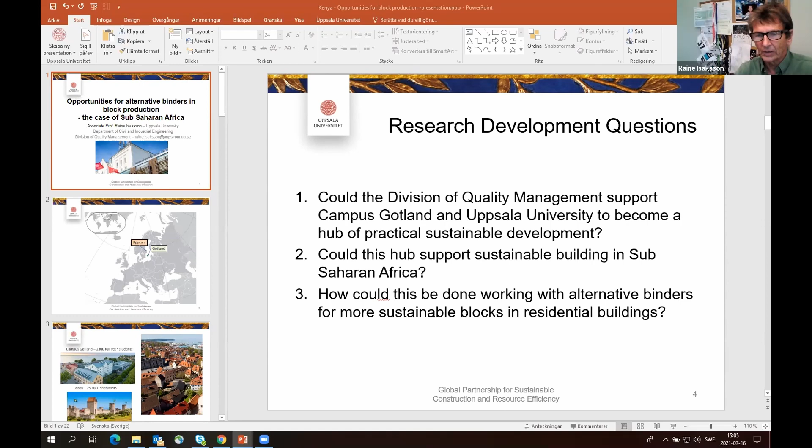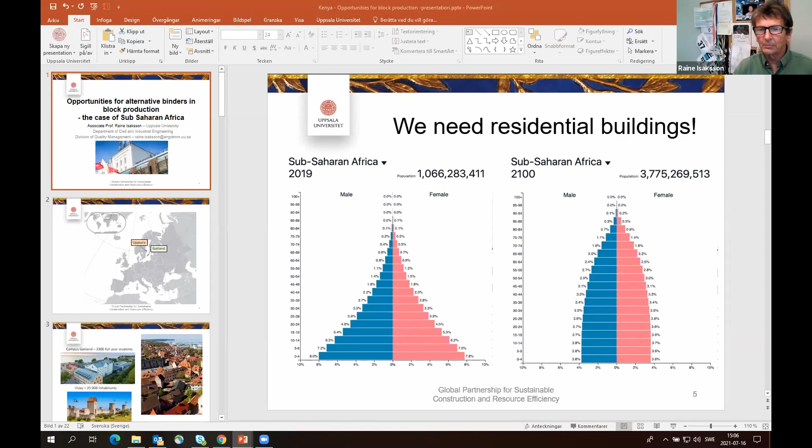I think it's always good to have a concrete example to generalize and understand the general picture of what we're talking about. So if we start from a needs basis, looking at sub-Saharan Africa, we can see this is an area where we're expecting enormous population growth, almost 3 billion more people from now until the year 2100. Most of those people are already born, so there's not much we can do about it. People will live longer and there will be more of them. This brings us to the next question: where will they stay and live?

If we assume this development also benefits sub-Saharan Africa until 2100, we should see that people actually get the accommodations, the dwellings that they need. This means that as the population goes from 1 to almost 4 billion, the per capita cement consumption should go from about 100 kilos to around 600 kilos, which is close to the global average now. North Africa currently has about 600 kilos per person.

So what does it mean? It means that from about 100 million tons of cement per year today, we will use maybe more than 2 billion tons. This is almost half of the global production, and we know that cement is responsible for some 8% of carbon emissions. So this is not very feasible unless we use the cement in a very good way.

So therefore, what can we do with Portland cement to use it better, or can we substitute with something else, so that we don't cook the planet while providing the development that people need in sub-Saharan Africa?

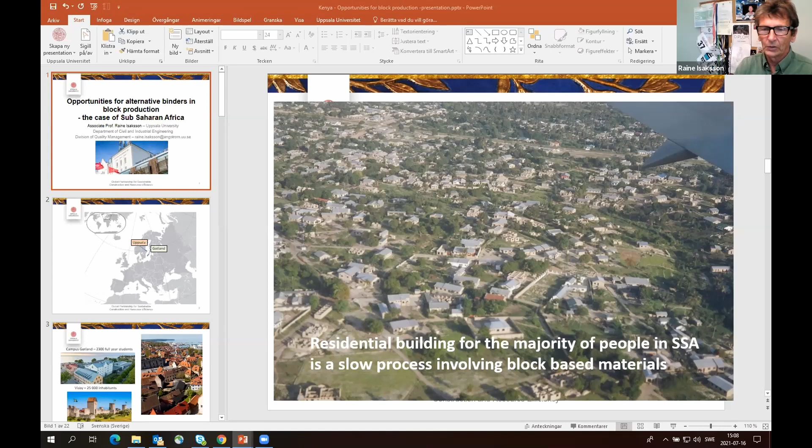Now, a little bit going back - why did I come into this? I'm a chemical engineer, I have a PhD in quality management, so why working with blocks in Africa? I had, I guess, a midlife crisis. I did a PhD late in career, and then after a conference discussing knowledge management in Kuala Lumpur, I went to Pangkor Island for 3-4 days and tried to see how I could contribute and what would be my comparative advantage. I worked 10 years in different African countries as production manager, technical director in cement manufacturing, also quality manager, laboratory supervisor.

So I thought, okay, I like Africa, something in Africa which has to do with building. And quality management, surely I should be able to improve those processes which are there. I also worked as a consultant within cement process improvement in the Nordic countries and in various African countries. So the solution was block excellence. I wanted to start in Tanzania - I spent 2 years as a volunteer there ages ago, and I speak some rudimentary Swahili, so I thought that could be a good place to start.

So trying to make sense out of block making - this started more than 10 years ago when I was on a consultancy trip to Dar es Salaam, and I stayed another week to try to understand what this is about, block production. Remember, I don't have any construction background, so I thought at least making sand cement blocks doesn't seem so technically complicated.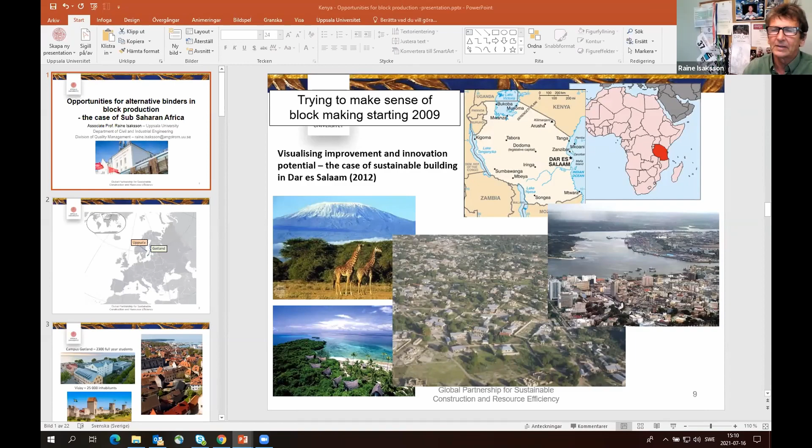I would be able to learn that in practice. Just some examples — I've had some people doing a minor field study at this time.

We started looking at Dar es Salaam, where 60% of the cement goes to blocks. About 1 billion blocks are produced yearly, and most of them, 90%, are solid blocks, where the cement is quite poorly used. So one idea was could we convince people to use hollow blocks? I had 3 students from Sweden looking at what stopped people from using hollow blocks. It was hard, I think it's a lot about people's attitude. Sometimes people don't like them, they say you can punch your hand through it, or shoot through it. No, we want a solid block.

The production of these blocks — there must be something between 1,000 and 4,000 small producers. They produce the equipment themselves, it's all mechanical workshops, and the technological development is not so much. They call them vibrated blocks, the matofali that are produced. A lot of manual work, as you can see the dosing of cement, half a bag, could be 23, 27 kilos. So there's a big variability in the results.

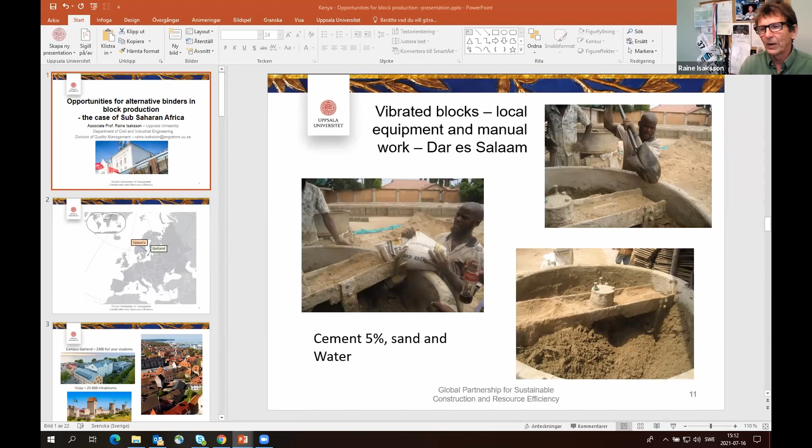And the challenge: 5% cement and then sand and water. So how do you make good use of cement when it's only going to be 5%? Well, I thought with the background I have, it should not be that difficult to come up with some improvements. It has proved much more difficult than I thought.

So trying to make some sense of this — this is definitely a wicked problem, and I think it has been mentioned in this work session that we need transdisciplinary and cross-disciplinary work. It's not only a technical problem, there's always administrative, cultural, and other issues in it.

So you start with Dar es Salaam, where 70% are basically squatters, as we saw in one of the pictures. With visual imaging you can see houses are just built randomly, and that's how it happens in Dar es Salaam, which means there's basically no documentation on it.

So what is the problem? How can we measure how this cement is used? We don't really know, because nobody measures it. So understanding the problem at first, to put figures on it, requires actually going out to the site, measuring yourself to find the values.

And then defining block sustainability — what is it? We heard earlier about concrete sustainability, I have maybe a slightly different opinion there. I think when we speak about buildings globally, they consume something like, or are responsible for, 40% of carbon emissions, and climate change is one of the crucial problems. So for me, building sustainability must include aiming at zero carbon footprint. Carbon footprint is definitely one of the critical environmental issues.

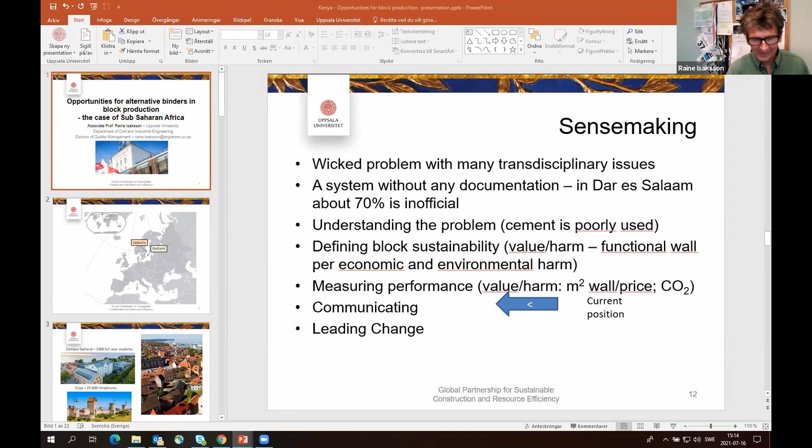So after some 10 years of work, this is as far as I've come. Not so good for a project where I maybe spent 2,000 hours, going to Tanzania maybe 20 times.

So the strength, obviously we measure it in megapascals. But how do the customers measure it? Class here, my friend is demonstrating — you take a block, you smash it to the ground. Aha, it only broke into 3 pieces, so this is good. If you ask somebody what is the strength in megapascals, nobody has an idea, not even what a megapascal is. So what you don't want to see is when you throw this and it goes to mush and just becomes powder.

Then you know this is not good. But at that level you are probably down to 0.5 or 1 megapascal. As soon as it's more than 1 megapascal it passes this simple test, but the customer doesn't know if it's 2 or 8 megapascals. It's almost impossible to know by pressing with your fingers and testing. So measurement is a big problem — how can you improve when you cannot measure?

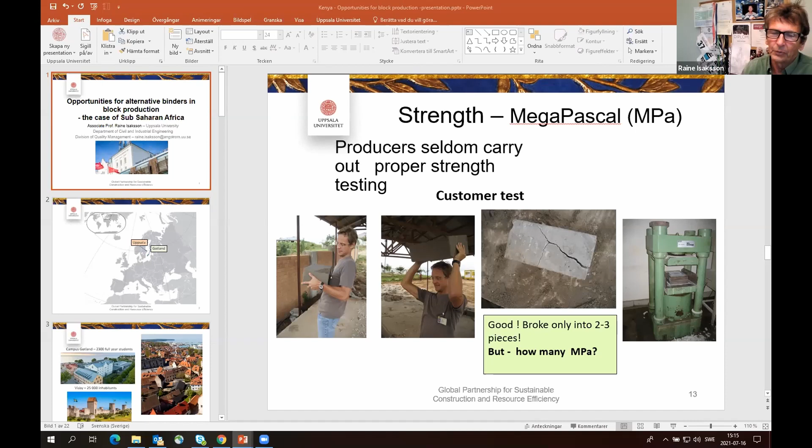But this is the same measure used for productivity, and it assumes that the only thing which matters is the percentage of cement, which is not correct. We can see a big variation in performance with the same amount of cement, but since blocks are not measured, this is often hidden. It's difficult to know that one producer is actually better than another because you're not measuring it, and normally there's no quality control.

Out of all the places, in Dar es Salaam, if there would be several thousand block producers, maybe 5 would measure the quality performance regularly.

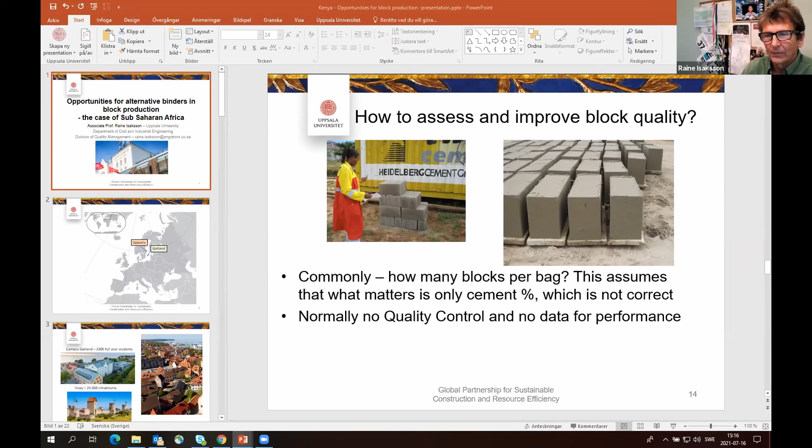Looking at Tanzania Bureau of Standards, to get some idea, these are the better blocks which have been taken for testing, which go to governmental projects or schools. Still, they come out with a variation from 1 to more than 5 megapascals. The standard says 3.5 as a minimum for an individual block, but 4 megapascals as an aggregated average for 5 blocks. So basically, most of these are substandard.

But does it mean they are not fit for use? Are people stupid when they buy them and build their houses? It might be turning out that what is stupid is the standard, which probably is inherited from a British standard somewhere, which comes from different conditions and maybe randomly put the compressive strength requirement at 4 megapascals.

Because if you think of it, 4 megapascals for a 6-inch block means it can sustain 24 tons, a reasonably big lorry. Now, when you build a single house with a tin roof, you don't need 24 tons.

Then the argument is, yes, but it's needed for durability. But when you look at all these suburbs where they have been building with 1 megapascal blocks, and nothing is falling apart, and they stand after 30 years, then you think maybe the durability is there anyhow. But there's little research on this.

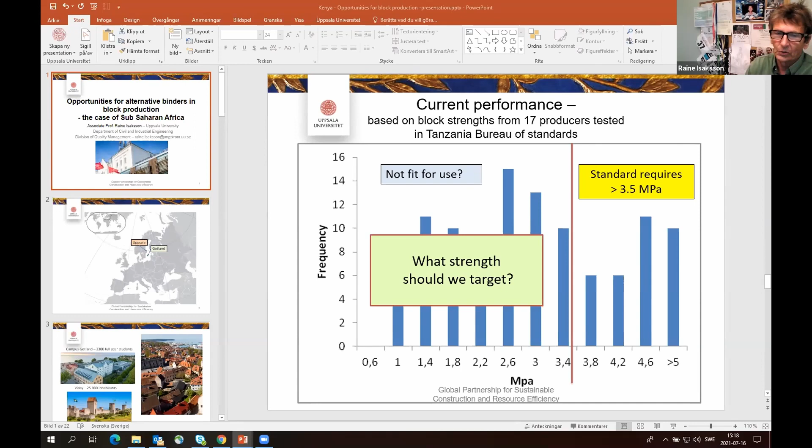So findings over the years, some kind of conclusion, is that cement is very poorly used, and I will show you in a moment why. Maybe about 20% of what is used in good concrete has been achieved here. So it means we're wasting 80% of the cement's building capability.

So one question I have is, could this actually be improved? And the answer is not much. That's why I'm repeating myself: we need to find alternative binders for these simple solutions. Cement should go to high rises, where it's demanded, to bridges, to whatever demands its good capabilities. It should not be wasted on simple blocks that need just a couple of megapascals.

Current standards are not relevant. We looked at this in Tanzania. If we were to increase the cement amount to what the standard, or the megapascals, requires, the only effect is that the cement becomes more expensive, buildings become more expensive, the carbon footprint is higher, but the functional value for customers is basically the same. So standards are partly a problem, and performance varies significantly with the same level of cement addition, but this is often not perceived.

A few of the issues that have surfaced in all my studies: of course, sand used, but quite often customers cannot choose, they get the sand that they get. Where they could do something is the water addition. Normally too little water is added. If you think of it, if you have 5% cement and 95% sand, you need to put quite a lot of water to get that compaction. Otherwise there are big voids and the strength will be very low.

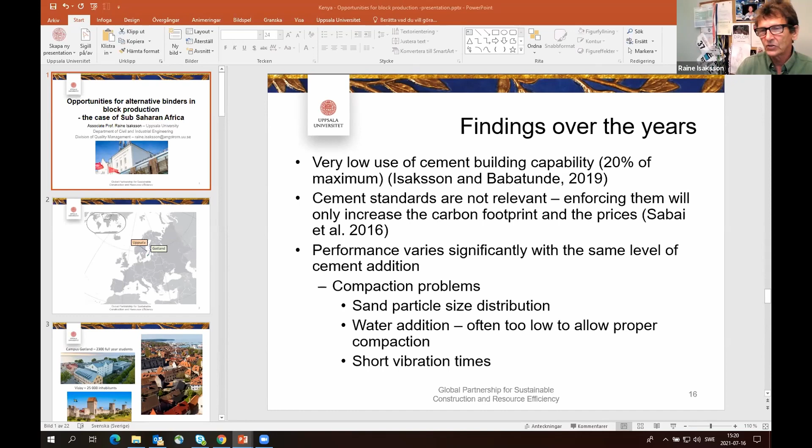But those that produce these blocks are paid per rate, and they do it as quickly as possible. So they optimize for speed of production, not for the quality of the blocks. And they wouldn't know, because nobody is measuring. Sometimes vibration times are also shortened to speed up production, which then reduces the strength.

This is a curve you've seen adapted. Here's the water cement ratio, with typical concrete at 0.5 water cement ratio as the reference, number 1. But what happens when we have 5% cement? We might have to add up to 10% water to get the sand matrix to compact properly. If I add 10% water with 5% cement, we end up with a water cement ratio of 2, or maybe only 1.5, meaning we only use about 20% of the potential strength of the cement.

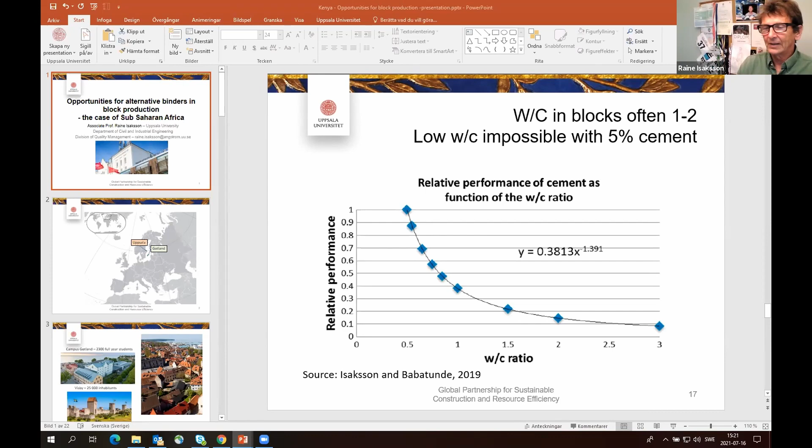Could this be changed somehow? Maybe improved a little with hollow blocks, which I've tested, but not substantially. This is a big problem: the blocks, 1 billion of them produced in Dar es Salaam and many other countries, use maybe only 20% of the cement's potential. So all that emission goes out for nothing because we use only a fraction of the capability.

This is one of the latest research projects, together with Apollo Buregyeya from Eco Concrete and Makerere University in Uganda. The Ugandan samples are taken from his plants, which produce cement blocks with higher cement content, for the higher end of the market, and he charges quite well on them. At this level of cement addition, you can show that for the same functionality, you actually get more kilograms of carbon dioxide per square meter of wall when using solid blocks. So hollow blocks are better, but only when you have standardized, good quality blocks.

When we look at Tanzania, 90% of the blocks are solid, and this is roughly the average we've found, though in many cases blocks are even of lower strength but still provide the functionality. So the low performing solid blocks have the lowest carbon emission, and they're also the cheapest. Hollow blocks, in this case, we found some at the same level, but they're normally more expensive, more difficult to produce, and have more breakage.

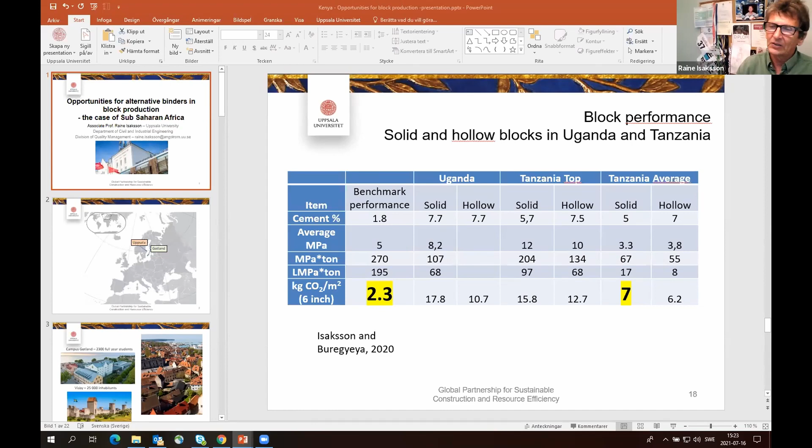So this rapid review of comparing is important because many people say, oh, in my country we only use hollow blocks because they're much better, and that's often what you see. But that's in a market where cement price is not as important as it is in many sub-Saharan countries. So the conclusion for the BLEX project, the Block Excellence project, is that from a user and climate perspective, the best solution is to use substandard solid sand plus cement blocks.

If you have aggregates available, you can improve the performance. In Dar es Salaam, they're not easily available, so sand becomes the logical material to use. Down to 1 megapascal seems to be okay. Research is missing here on what's really needed. A 1 megapascal, 6-inch block could still carry 6 tons, so if it's put well in place, compressive strength should not be a problem.

Then there's durability, where research I think is missing. Standard requires 4. So for higher performance blocks, for government projects or where measurements are required to fulfill standards, hollow blocks would normally be a better solution, giving both a lower cement consumption per square meter of wall and lower carbon emissions per wall.

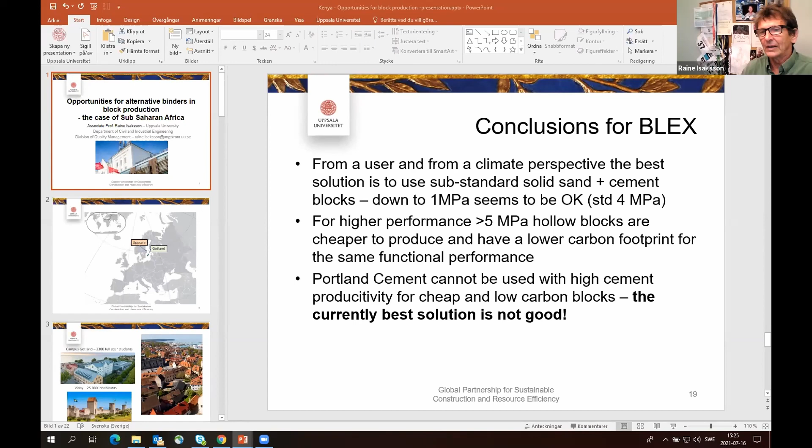My conclusion after all this, and I should have come up with it earlier, maybe I'm a slow learner, is that Portland cement really cannot be used with high cement productivity. If we go down to low levels of cement percentage, we only use a fraction of its building capability. If we increase the cement again, we produce strength that isn't needed. So the currently best solution is not a good solution, which brings me forward.

There are two things here for future research. One is what we can do with the blocks - I think things could still be done there, maybe improving performance by 30 or even 50%, but that won't solve the big problem with cement being produced in big factories normally costing $150 to $200 million. It happens in places in Tanzania that cement is transported 1,500 kilometers. We would instead need alternative binders that can be produced in smaller local units that perform well.

But having said that, I think there's still work to be done, looking at standards - are they actually applicable for the use they're intended for? Here, I think there's still a lot of copying from Europe.

I think the local standard authorities have work to do. How good is the cement performance in different countries? How many strength tons do we get out of our solutions? I claim that for the blocks it's low. How is it generally for other countries? This is also not known.

The water addition - here there could be a feasible way forward in trying to find the right water addition, which gives you the best compaction, but the possible lowest water cement ratio. There is an optimum. We tested it and we know that there's an optimum. Normally in those cases, I've seen too little water is used because those using it do not know what the results are. Hollow blocks also in some cases would be a solution.

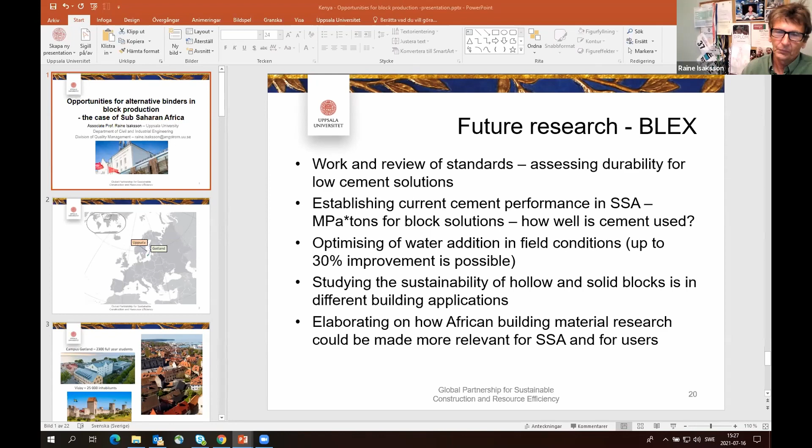So we're going to go for looking at the use of volcanic ashes, calcined clays, thinking of maybe substituting, not having any cement at all, but using free lime as activator and making block binder materials. Not trying to make an ordinary cement where we substitute 20% with some additives, but making a block binder, going directly for the blocks. It's not going to be according to a standard, but as long as the blocks are corresponding to the requirements, it's fine. So it's just being called a block binder, so we can divert the standard issue here.

And then also, as was mentioned in the previous presentation, if the soil cement - I think it would be good if we can substitute the cement, because when using the cement, the carbon footprint exceeds even that of the cement sand blocks. We also have a networking call where we hope to get some appropriate technology ideas in. We're thinking of a cooperation, Sweden, India, Sub-Saharan Africa, in trying to get technology for producing these alternative materials, small units, which could be such that local businessmen can invest in them.

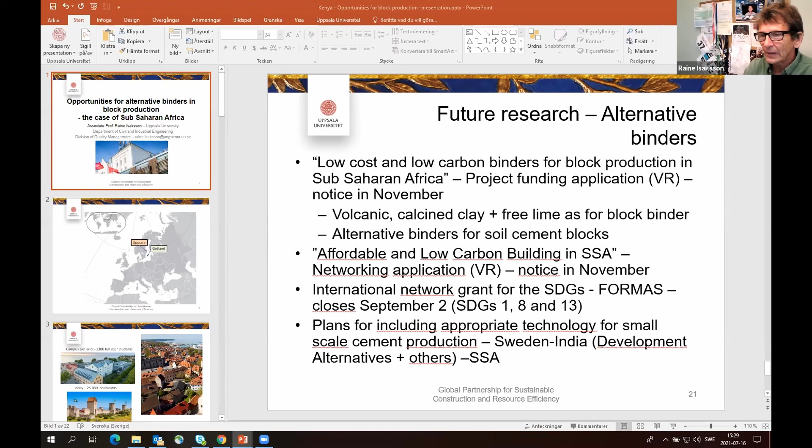Thanks. Okay, thank you very much, Raine. And I think this is a great session to end on before our break. One important point that you've highlighted is about affordability. And I think it's excellent that you are an expert in quality management, because for sustainability, we need affordable but good quality material, which often doesn't come - it doesn't always come together. But I think if we can get to that, it would be very good, and where other people are included as well. So thank you very much.

It's been a really good session, I think, and very important points have been highlighted, from the importance of engaging local communities, working with young people, young women, but also collaboration and interdisciplinary collaboration with earth scientists, social scientists, health sciences. So I think, yes, I hope that the collaborations will continue. And thank you to the organizers for bringing a diverse group of people together. And yes, I'll hand on to Luca. It's been a pleasure listening to everyone today.